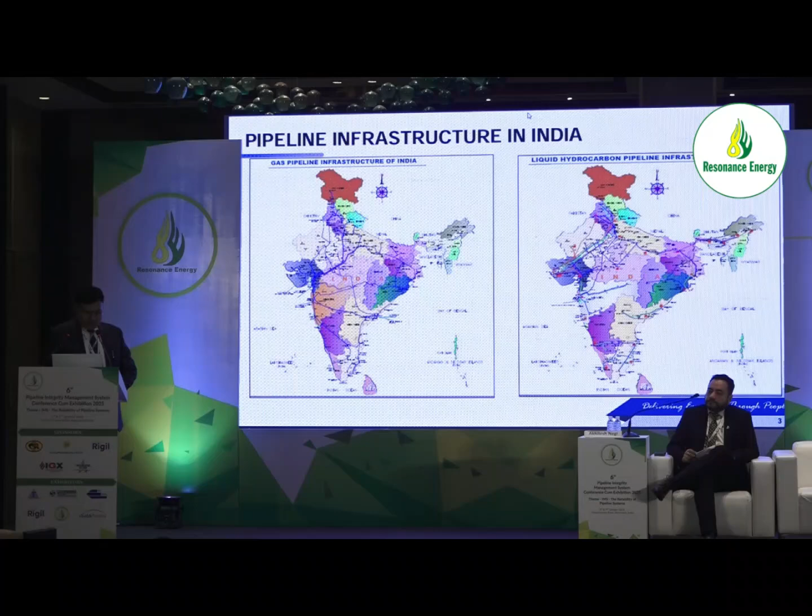This is the introduction of the pipeline. Basically, a pipeline conveys fluid from one location to another. This pipeline system is a very economical, cost-effective, and efficient way to transport fluids.

As you know, our country is the most populous country, having the world's number one population. Worldwide, we are the third largest energy consumer. As per our energy basket, gas-based economy is only 6%. The Government of India has given a target to companies that this should go to 15%. Globally it is 22%, and the world is moving to 25%. But to increase the gas-based economy from 6 to 15%, more pipelines are required.

Pipelines have become significant propellers for the growth of Indian industry. That's why, to meet the energy demand of the most populous nation, many more pipelines are required. Pipelines transport crude oil, products, gas, and many more.

Pipelines have compressors, valve stations, and control systems. This pipeline system provides energy security to all consumers, whether residential, commercial, or industrial, because pipelines transport energy continuously with minimal delays. Unlike tankers, which deliver energy in bundles, pipelines transport it continuously.

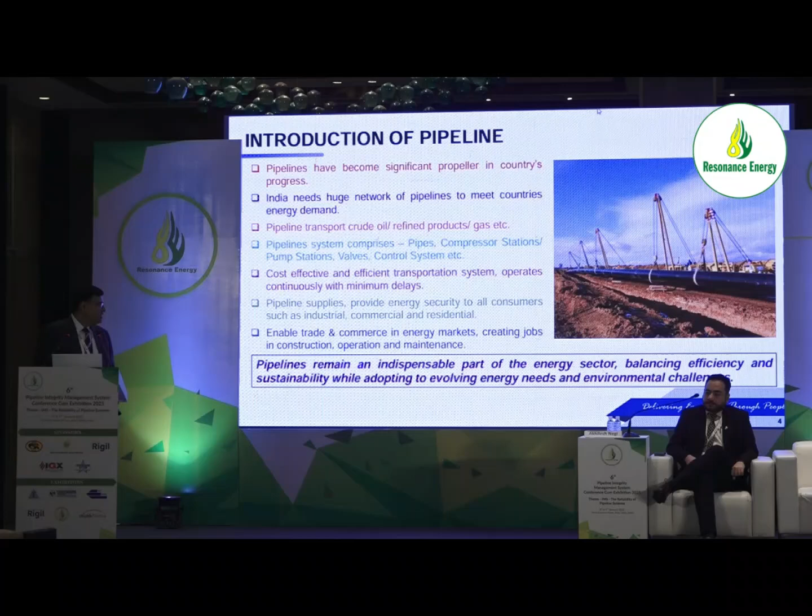This is the way of transportation — as I told, it requires less energy. For transporting product, gas, or any other fluid through pipelines, the energy requirement is approximately 0.5 to 2%, as compared to 3.2% for road transport. There's also negligible loss of product in transit — 0.15% by volume transported through pipelines versus 0.35 to 0.5% in railroad.

If you compare the transportation system by pipelines in India and America, India's pipeline transport share is only 32%, with 68% transported by road, rail, and water carriers. However, in America, pipeline transport is 68%, water carriers are 27%, and others are 2 to 3%. In America, pipelines span 5,73,000 kilometers; in China, 1,50,000 kilometers; in Canada, 1,17,000 kilometers. But in India, only 56 to 57,000 kilometers, even though we are the most populous nation.

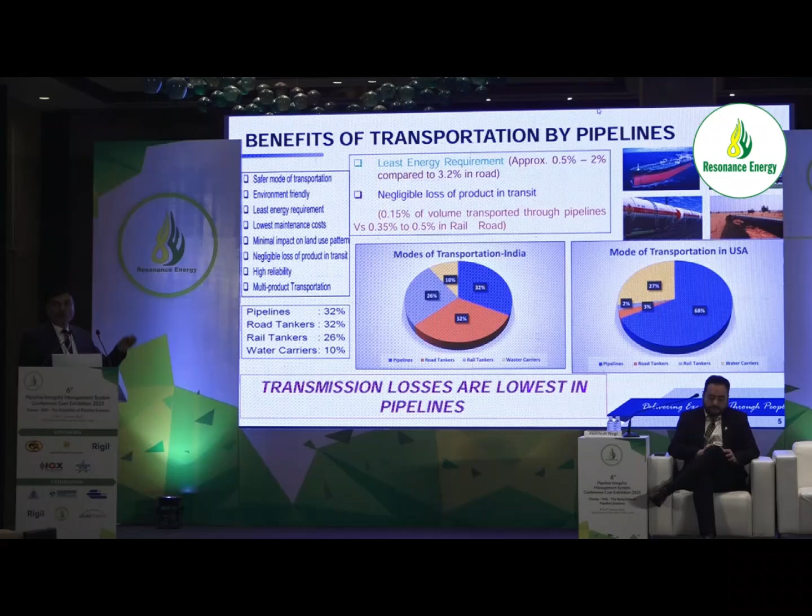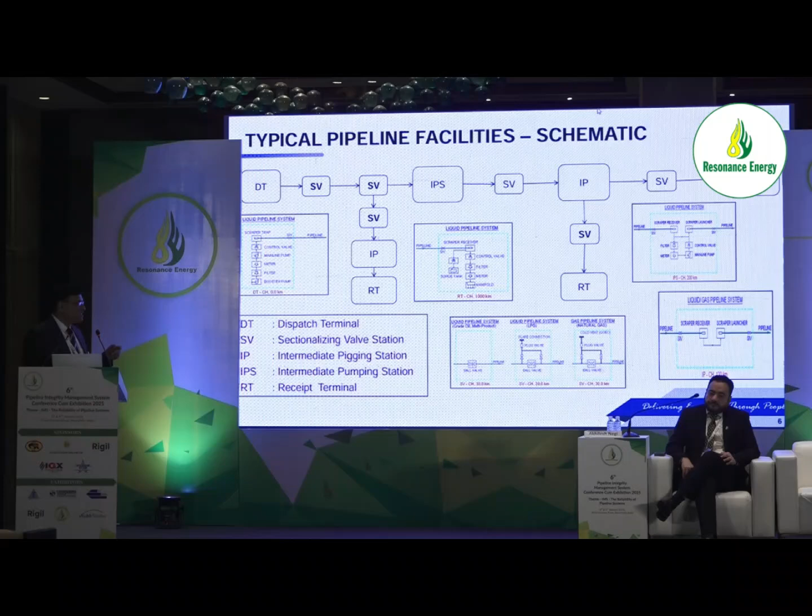This is the typical pipeline facility, meaning transmission lines as well as spur lines. The system includes dispatch terminal, SV station, intermediate pigging station, pumping station, and receipt terminal. For gas pipelines, there is also a compressor station.

These are basically the project phases of a pipeline: one is the design aspect, another is installation, and the third is operation.

In design, there are many studies we have to carry out. We follow different codes like API codes, ASME B31.8 for gas pipelines, B31.4 for liquid pipelines, and various analyses such as API RP 1102 for rail and road crossings, API 1104 for welding, API 6D for valves, and many more codes for designing pipelines.

There is also a location class survey in the case of gas pipelines, and what was discussed earlier as HCA, High Consequence Area — this has now been changed to CCA, Critical Consequence Area, in OISD 141, latest edition. The definition has changed from HCA to CCA. Earlier, 46 or more dwellings was called HCA; now it has a different definition.

That is totally defined in the OISD 141. Then there is a sectionalizing valve. Nowadays there is a very much challenge about sectionalizing valve installation because nobody is able to procure the land to install the pipeline SV station. That's why optimization of SV, we will define later in slides.

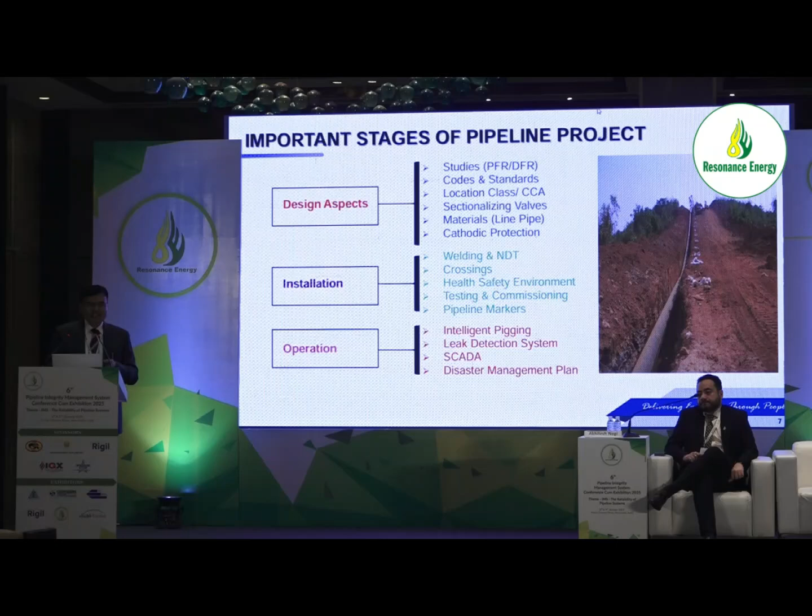And installation involves many activities like trenching, stringing, welding, crossing, and health safety environment during construction, which is very much important for the pipeline. And finally, testing and commissioning, which we will explain later. Finally, after installation, there are pipeline markers showing where the pipeline is going. And operation includes intelligent pigging, leak detection system, SCADA, and disaster management plan.

Now these are the basic activities. First one is conceptualization, then detailed feasibility report, basic engineering, and detailed engineering.

In conceptualization, what do we do? Basically, we study various alternative routes for the pipeline, to determine which route is most techno-economically feasible, and what are the constraints in various routes, which route has fewer constraints. Accordingly, we select the option for investment, and then prepare the detailed feasibility report.

In the detailed feasibility report, we define each and every route option, and each and every crossing, and what type of methodology to be adopted for installation at that crossing. Hydraulics determines the size of the pipe, and design requirements, and requirements for MTO, material takeoff - how much quantity of pipe is required, how much material for station piping, how many land parcels are required, and total project cost is established, up to plus or minus 10%. That is the detailed feasibility report.

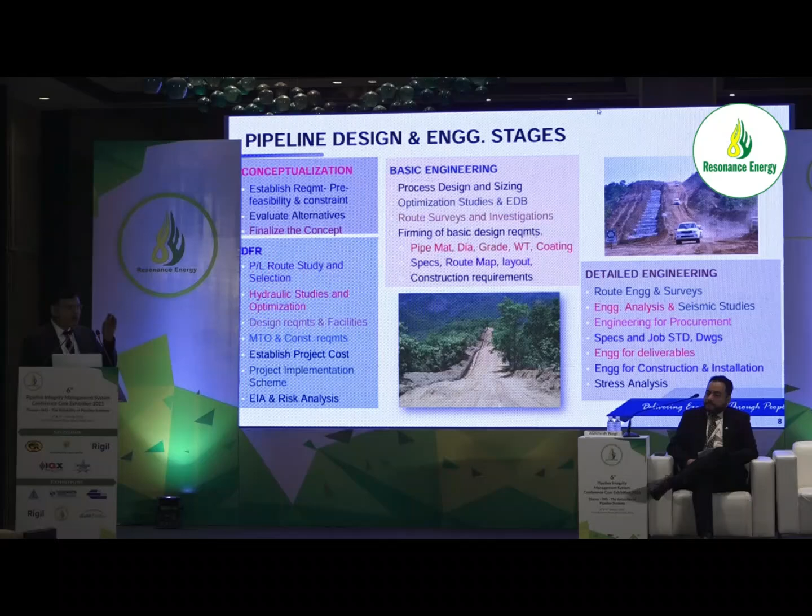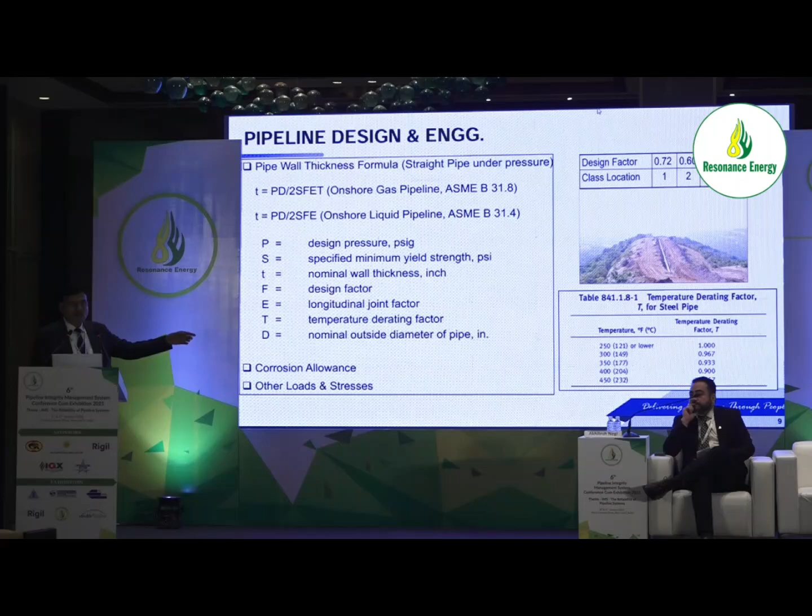If you see, the temperature derating is for steel. Up to 121, there is no derating, but beyond that, there is a derating factor, since material strength gets reduced.

These are the basic reports which we prepare during design, basically wall thickness analysis. Normally, wall thickness is calculated based on the hoop stress. Some thickness may come out, suppose 5 millimeter or 10 millimeter, whatever it may be. Then we analyze where the pipeline passes beneath the railway, beneath the highway, rivers, roads, based on API 1102.

According to that analysis, whichever thickness comes out higher, we have to select that. Then again, we have to check if the pipeline is passing through a seismic zone, and analyze the seismic requirements.

If thickness has to be increased, then it has to be increased, and that much thickness should be selected, not based solely on hoop stress. Whichever thickness comes higher, based on that we select. We have to compare whether this thickness is available in the market or not, checking what thickness of plate or pipe is available. But if quantity required is more, as per API 5L, nowadays any thickness can be manufactured. So if quantum is high, this can be manufactured, and we select based on that thickness. But if pipe quantity is less, then we have to go for the standard thickness.

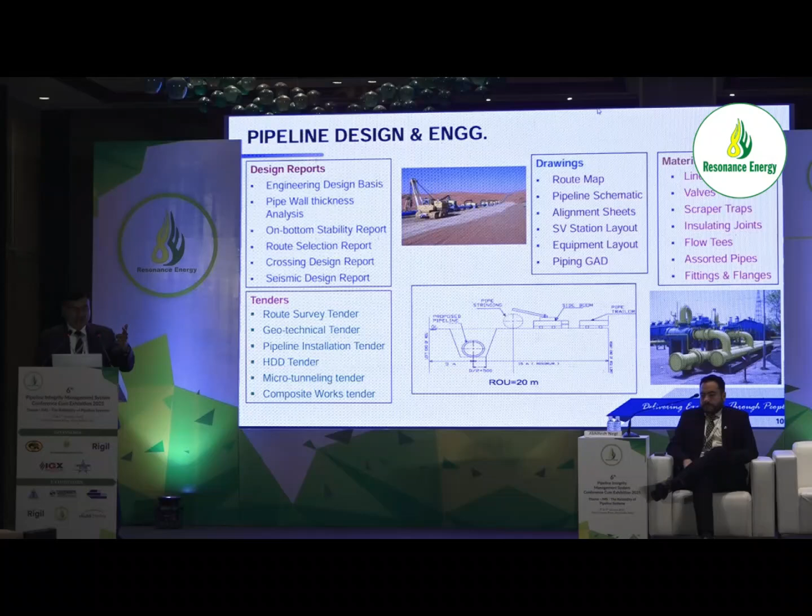This is basically the line pipe selection criteria, and it is most important because it accounts for 35 to 40% of the project cost. The line pipe is selected based on fluid characteristics—the type of fluid, whether gas or liquid, corrosive or non-corrosive—and the operating condition, what is the pressure and temperature.

Suppose it is a permafrost region, then we have to select the material according to that. Mechanical properties matter too—what is the yield strength, whether it is grade B, X42, X46, X56—according to that we select. Toughness and Charpy requirement depend on the operating temperature of the pipeline fluid, and accordingly we take the Charpy requirement. Hardness of the material is also very important for the line pipe.

Various standards—normally in India we follow the API standard for procuring line pipes—and environmental parameters like extreme temperature, geographic consideration, and external corrosion matter. Suppose soil resistivity is very high, then we have to select the material according to that.

And welding and fabrication—when we select the pipe, we have to see whether pipe formation will be easy or not. Suppose it's a very tough material, then pipe formation will be very difficult. You can ask Mr. Bhavin Mapra, he is well versed and can explain it very well.

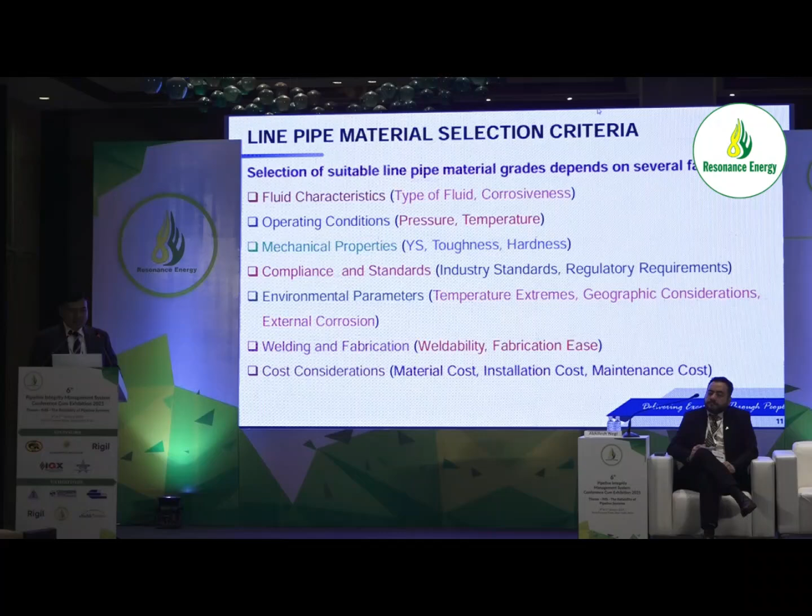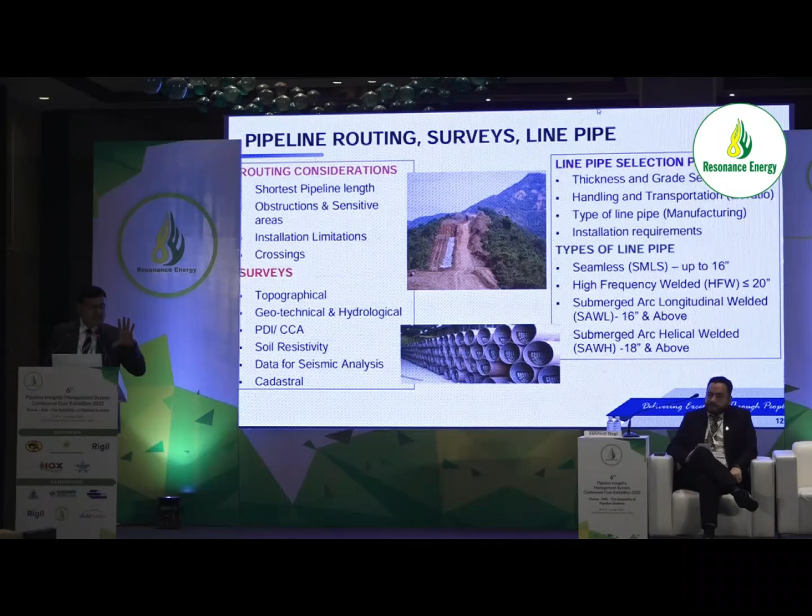Then pipeline route surveys—these basically cover shortest route, avoiding obstructions and sensitive areas, and installation limits. Suppose you are going over a hill, then you have to see what length of pipeline can be installed. If a 12-meter pipe cannot be installed up to that height, then you have to take a 6-meter or 4-meter length of pipe, and select accordingly.

And crossings like river crossings, ponds, marshy lands, railways, highways—these should be minimized as much as possible. Then there's topographical data, surveys, geotechnical and hydrological studies, and PDI, basically population density index, in case of gas pipelines. For gas pipelines, there is a population density index with class 1, class 2, class 3, and class 4—four classes.

If population density is less than 10 dwellings, then it is location class 1. If it is 10 to 46, then it is location class 2. If it is more than 46 dwellings, then it is location class 3. If multi-storied buildings are present, suppose passing through city areas, then it is location class 4. Accordingly, the design factor changes, as I have shown in the earlier slides.

Then, as I told you about line pipe selection, thickness and grade selection, handling and transportation of pipe are also important because the D by T ratio is very important. Normally, we select the D by T ratio to be less than 100 for the pipe. Suppose the thickness coming from pressure calculation is less, and D by T is getting more than 100, then we cannot select that—we have to select based on the pipe or D by T ratio. To control the D by T ratio means the thickness will get increased.

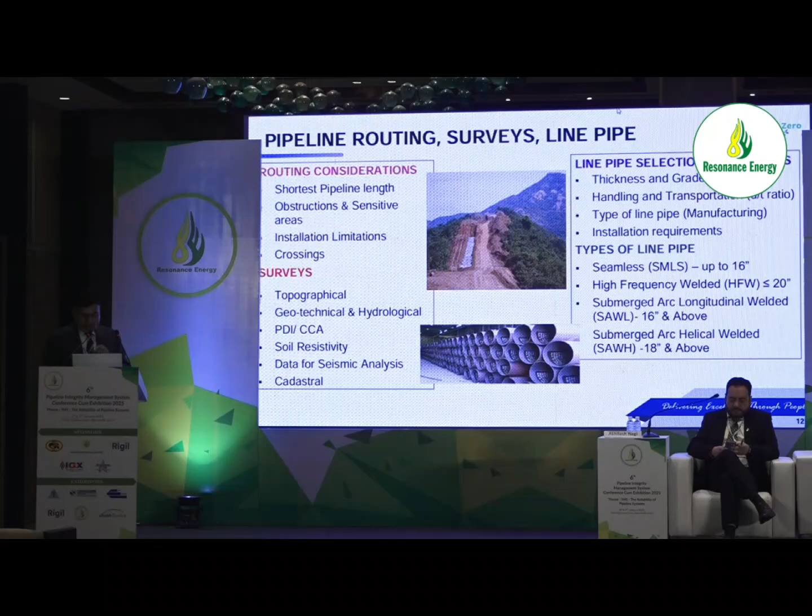Type of line pipe, like SAWL pipe, SAWH pipe, HFW pipe, or seamless pipe—what type of pipe is required to be selected depends on the manufacturing range. Seamless pipe can be manufactured up to 16-inch. High frequency welded pipe is normally taken up to 20-inch, but a few manufacturers like Tata Steel manufacture up to 24-inch HFW pipe. Longitudinal welded pipe is used for 16-inch and above, and helical welded pipe for 18-inch and above.

These are basically the coating selection criteria. As I told you, coating is very important for reduction of the surface area of the pipe for cathodic protection. The coating selection criteria include service conditions, performance of the coating, anti-corrosion properties, and electrical properties like

dielectric strength of the coating material. Ease of application means when coating is applied at the coating plant, it should be easy to apply. And after coating application, repair should be easy, and it should be cost effective. The coating should also have UV protection, so it should not degrade when we keep the pipe in open sun.

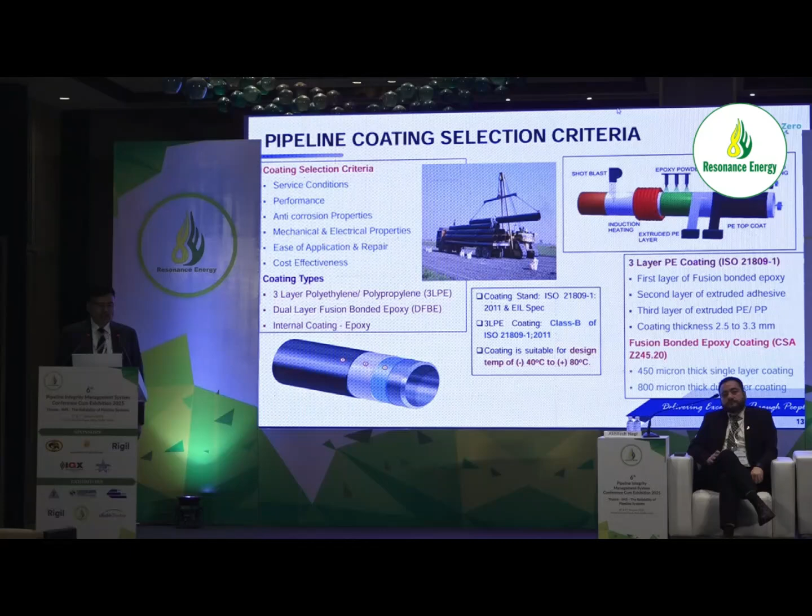Then there is the valve selection criteria. Valves are very important in pipelines, like sectionalizing valves. There are many types suitable for the intended service and application. Suppose it is gas, crude oil, or white product—the valve bore shall be as per API 6D, because valves are based on API 6D as per codes and standards.

Easy operation and maintenance is required. Whoever is supplying must have a previous track record, meaning they have previously manufactured that type of valve and supplied it, and it is in operation. This is very important, because if it's the first time it's being made, it may not perform well and your investment gets lost. Also, the lowest O&M cost—operation and maintenance cost—should be lower.

Sectionalizing valves should be full bore, because we have to pass the pig through the valves. Welded body design is normal for all sectionalizing valves, because if it is flanged, there is a chance of leakage. That's why all sectionalizing valves are buried and of welded body design. For operation, there is a stem extension. And most important is availability of vendors—the vendor must be available, because if the vendor is not there, how are you going to purchase the valves?

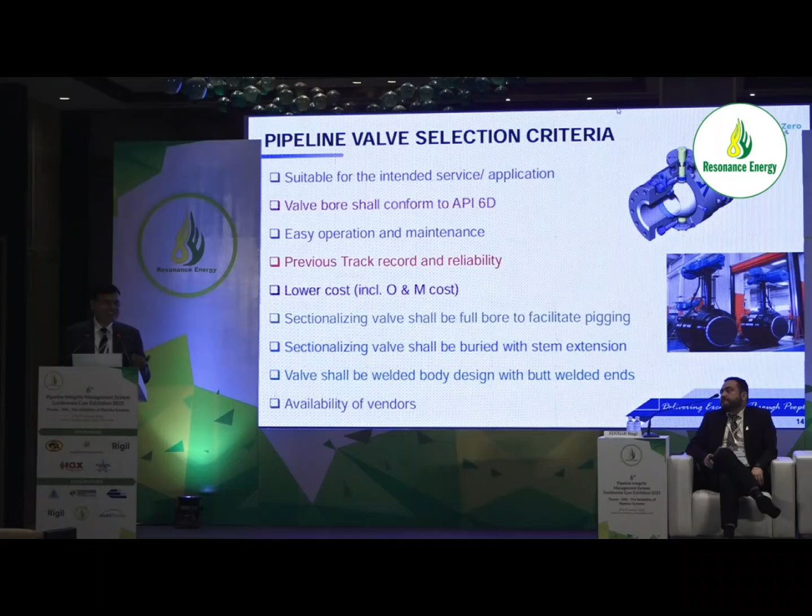Then SV selection criteria—as I told you, SV selection is very important. In gas pipelines, SV installation depends on class location. If it belongs to class 1 location, the spacing requirement is 32 kilometers. In class 2 location, it is 24 kilometers. In class 3, it is 16. In class 4, meaning city area, it is 8 kilometers.

But you have to carry out the PDI, Population Density Index survey. Normally, what our surveyor does—survey agencies take 1.6, 1.6, 1.6, 1.6 kilometer segments. But this is not correct—it should be 1.6 kilometer long and 400 meter wide. They just take it and survey accordingly, putting this much population, this much population. Basically this is not the correct method to do the population density index survey.

That is called end-to-end mile survey, but we should do a sliding scale survey instead. Basically, we have to select a 1.6 kilometer stretch, check it, then slide it to where the density is going to change. Accordingly, we slide and optimize how much is class location 1, how much is class location 2, how much is class location 3, how much is class location 4. That is the optimized way of doing the population density index.

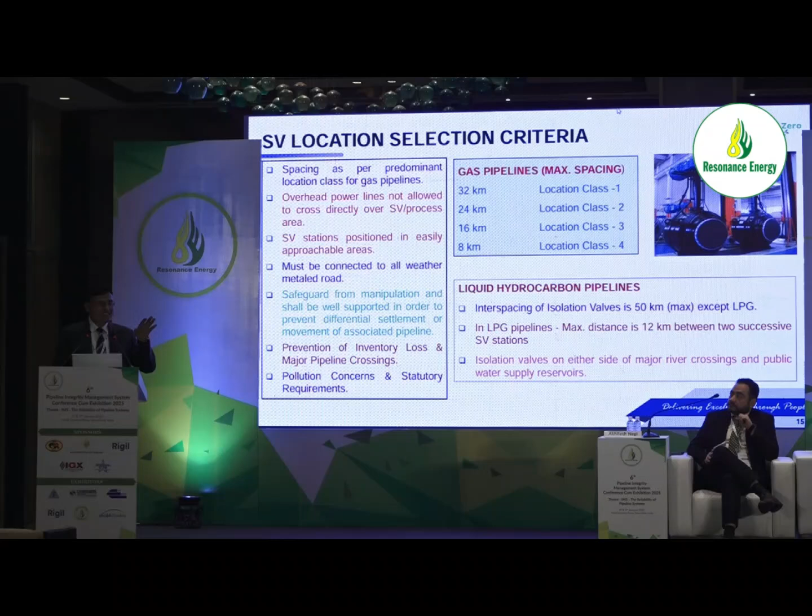Another consideration is access required—as I told you, it should be all-weather accessible. The SV should be free from existing structures and obstructions such as electric poles, pylons, etc. The location has to be checked—when we select the SV location as an engineering consultant, we look at the imagery available in the public domain, and the survey alignment data provided by the client and carried out by the survey agency. According to that, we check where the metalled road is, and whether there is any electric pylon or electrical line at that location.

According to that, we select the location considering the code requirements—32, 24, 16, 8, or 50, or 12 kilometers, whatever it may be. And the area should be free from flooding and inundation—there should be no water logging in that area.

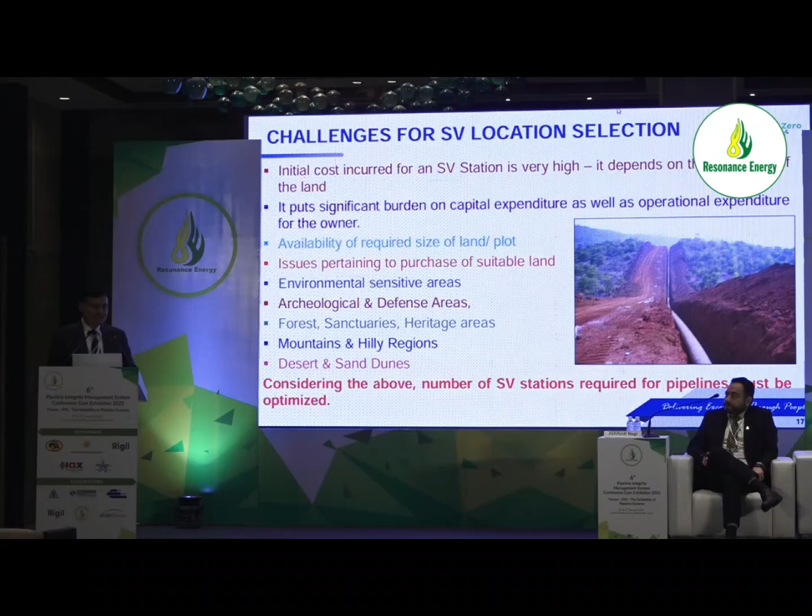Considering the above, number of SV required must be optimized. So how is optimization done? Based on the sliding PDI, as I told, number of SV stations can be optimized considering the predominance of population location. For liquid hydrocarbon pipeline, considering the challenges associated with SV station locations, instead of providing dedicated SV on either side of the river, each SV station has to be optimized. If you see the diagram, there are two SV with two rivers. If the two rivers are close to each other, then we optimize and provide only two SV. Otherwise, as per code, 4 SVs are required.

But in the second case, if you see, the two rivers are a little bit away. Then in between, we have put one SV. As per code, another SV is required because 4 SVs are required total. So that much optimization we have to carry out based on engineering analysis.

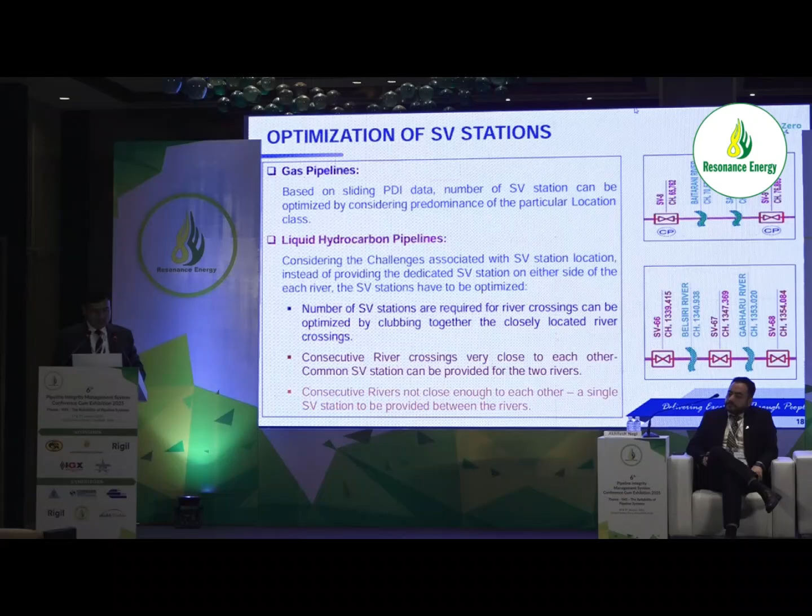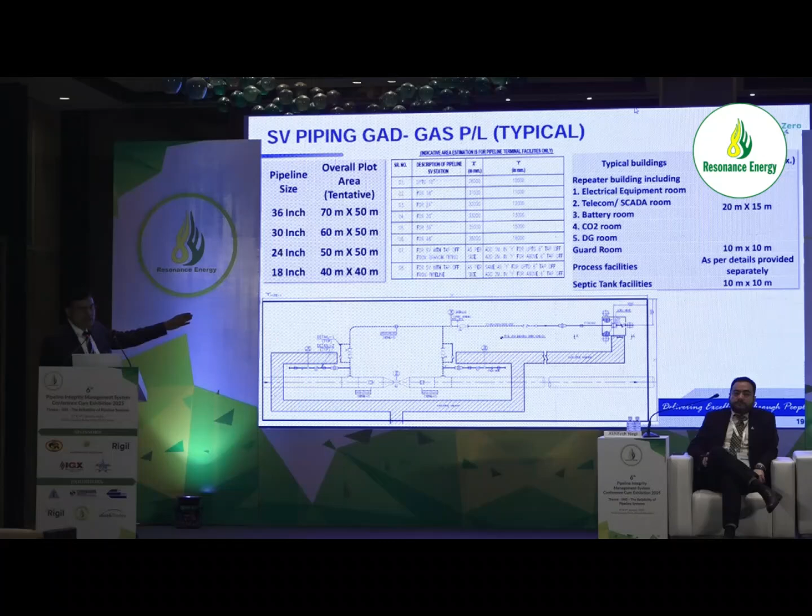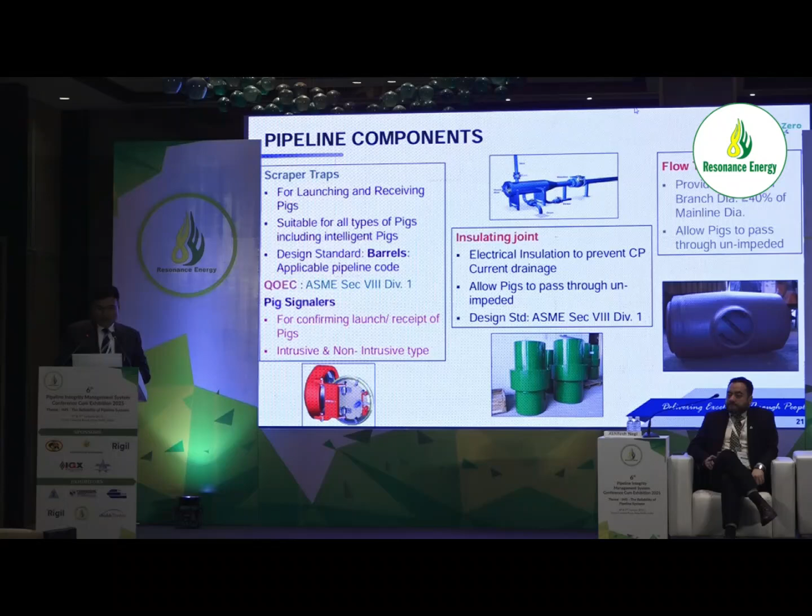This is the SV land requirement. If you see the gas pipeline, we have given the overall plot requirement and what are the process area requirements. If you see the dimensions, process area requirement for each and every size of pipeline - this is typical, and overall plot requirement is this. And for the liquid pipeline, process area requirement is this, and overall plot requirement is this, as indicated. These are the typical pipeline components - scraper launcher, pig, insulating joints, and flow tees.

Now pipeline construction. There are many stages in pipeline construction. One is pre-construction survey, then installation, then crossings, testing, pre-commissioning, and commissioning. In pre-construction: route survey, ROU clearing and grading. These are the requirements before digging the trench.

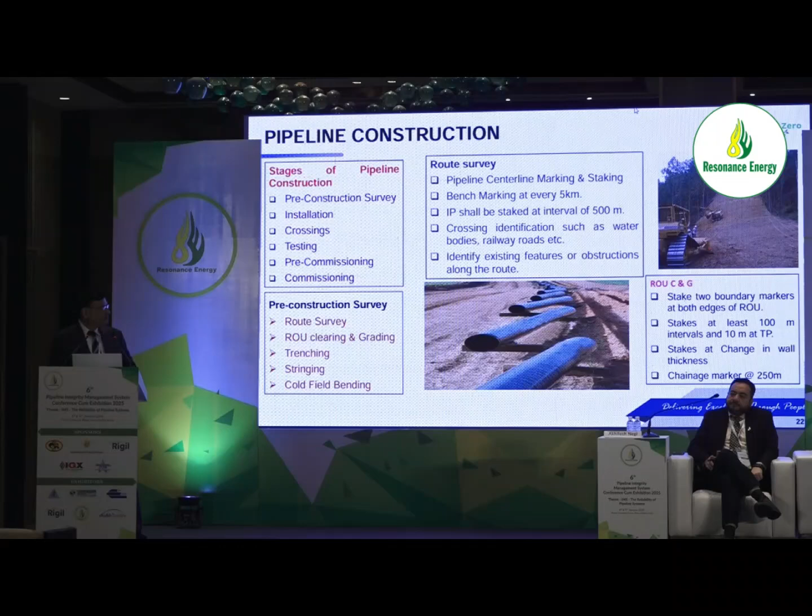Then installation, welding. Welding is very important for any pipeline system. There are 4 types of welding procedures. One is WPS1, called main line welding. Another one is WPS2, called tie-in welding. The third one is repair welding procedure, and the fourth one is also full repair welding procedure. In pipeline, normally WPS1 is totally downhill welding. And in WPS2, that is tie-in welding, because there is cutting involved in the pipe - the pipe is not as smooth as manufactured in the pipe industry - that's why in that case, all passes are uphill.

Then NDT. In pipeline, normally if you see plant piping, there is gamma ray carrying out the NDT. But in pipeline, X-ray is mandatory. All joints must be X-rayed.

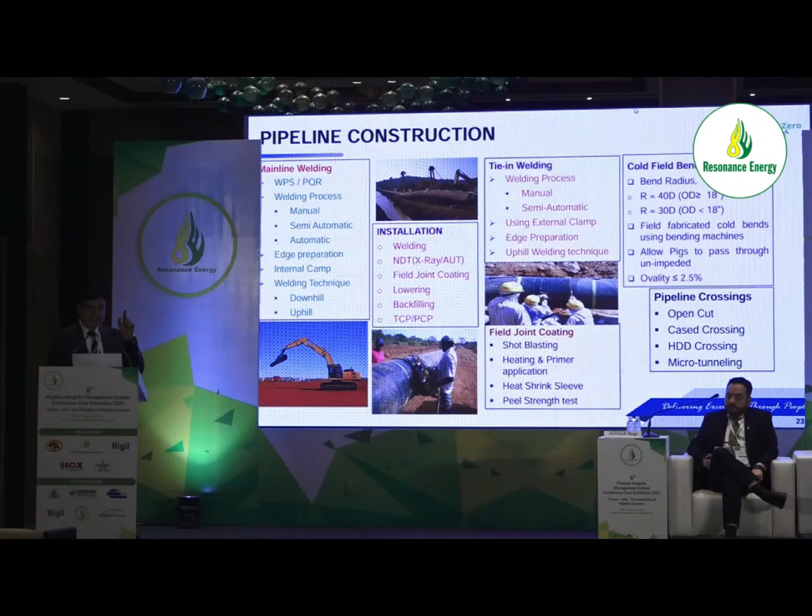And in pipeline, normally as Tiwari told, pipeline is not going in a straight way, in different directions. That's why cold field bending is very much required. So for pipe size greater than 18 inch, 40D radius of curvature is required, and less than 18 inch, 30 times diameter is required. And ovality should not be more than 2.5% of the pipe. Then pipeline crossings - open cut method, cased crossing method, and HDD crossing method. I will explain HDD crossing more, and microtunneling.

This is the pipeline construction testing, hydro testing. Hydro testing is one of the most important parts of the pipeline after construction. It is a strength test, you can say integrity test, whatever you want to call it.

For the pipeline, you have to define the section, how much length you take in one section for hydro testing. As per EIL requirement, I defined 50 kilometers as the section length for hydro testing.

But you have to see whether water is available in that location or not. So first you have to make the hydro test section planning. How do you make the hydro test planning?

Because based on the elevation of the area, we have to calculate P maximum, how much maximum pressure there is and how much minimum pressure there is. According to that, we have to calculate the height.

How much height can be there where maximum pressure is. According to P equals HDG, you calculate the height and select how much length can be taken. It may not be 50, maybe 35 kilometers, because the height increases over 50 kilometers.

That's why we have to select the section length based on water source. If water source is available, according to that, you make the section.

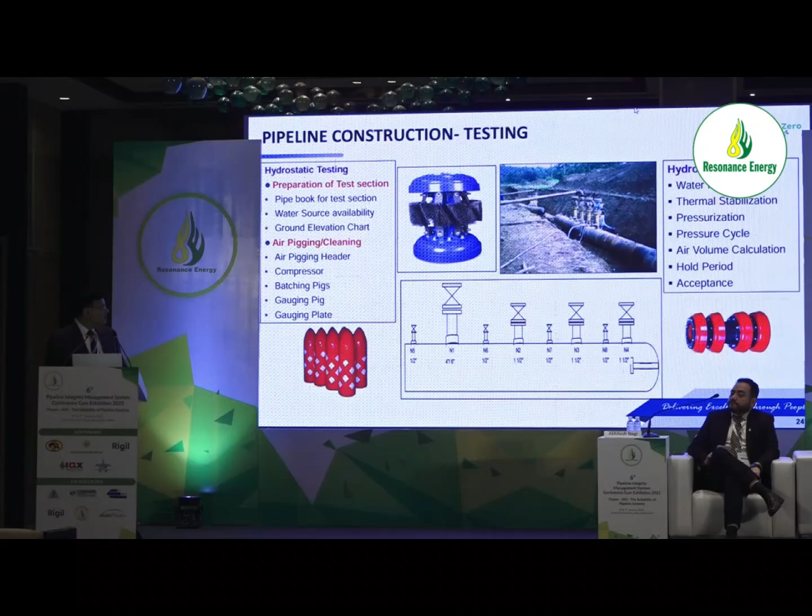For that, you have to install thermocouples. How you install them, how much distance apart they have to be installed, and how you determine the pipeline is thermally stabilized.

When the difference between the average temperature of the soil and the average temperature of the pipe is 1 degree, then you can say the pipeline is thermally stabilized.

After thermal stabilization, you have to start the hydro test pressure cycling. In pressure cycling, you have to check how much air is entrapped in the system.

Then we calculate theoretical volume by formula and practical volume by dropping 0.5 bar pressure and collecting the water. The collected water divided by the theoretical water calculated, that ratio ideally should be 1.

If it is not 1, it should not be more than 1.06. If it is more than 1.06, you have to recalculate, and if it is still not coming within range, then you have to drain out and refill the water.

Finally, the acceptance criteria: when water is filled and everything is okay, then the difference between initial pressure and final pressure after 24 hours should not be more than 0.3 bar.

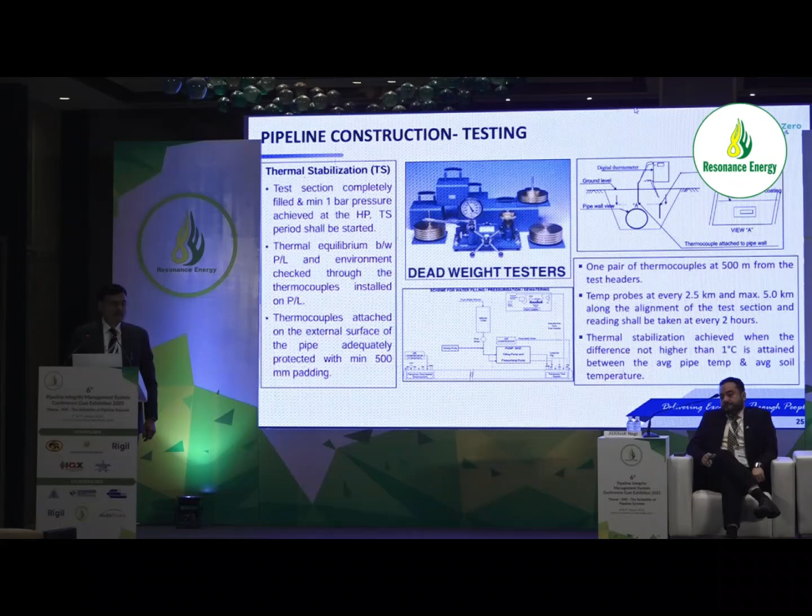Now I am going to talk about long length HDD crossings.

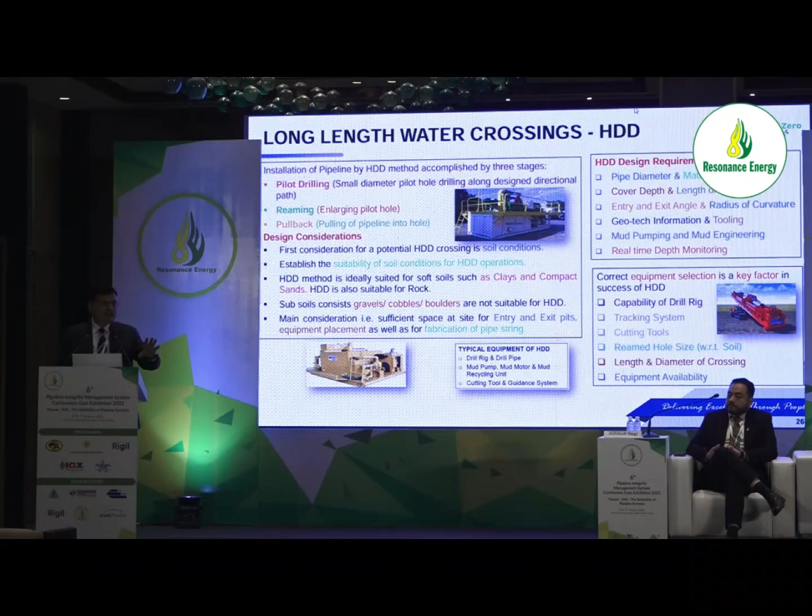And in HDD, drill pipe is very important. Nobody asks about how much quantity of drill pipe you have. Suppose you want to carry out HDD of 1000 meters, then you require 2 kilometers of drill pipe if you ideally carry out. Otherwise, you have to again and again transport the pipe here and there.

Now the technical feasibility and pilot hole limitation. The technical feasibility of HDD basically depends upon the length of borehole, pipe diameter, and subsurface conditions. As I told, geotechnical data.

Basically it depends upon the hole - whether it is fluidized or open. Fluidized means...

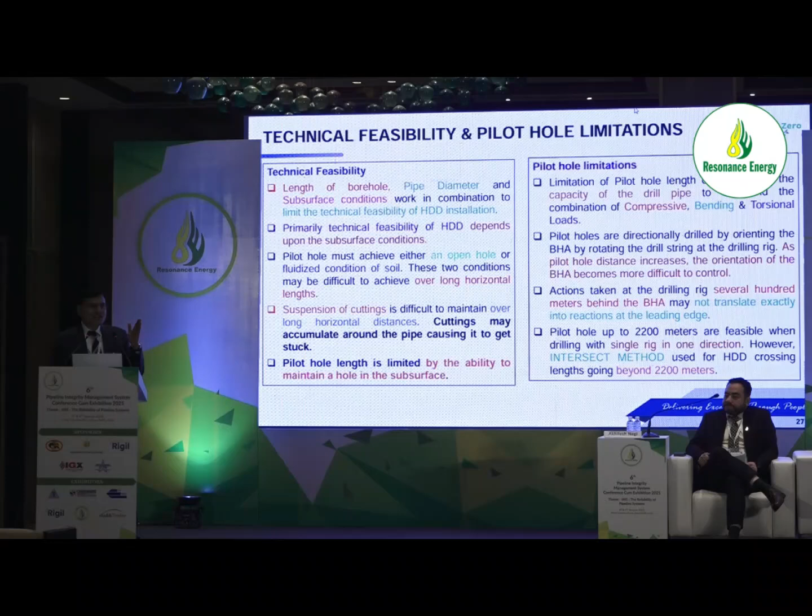That's why up to 2,200 meters by one rig you can carry out the HDD easily. But if there is a longer length, we have carried out in the Paradip Numaligarh pipeline: Ganga at 4,000 meter HDD, Bhareli river 4,000 meter HDD, Subansiri 4,000 meter HDD, even Brahmaputra we are carrying out 4,000 meter HDD. For that we require the intersect method.

In the intersect method, what we do: we put two rigs, one rig from this side and another rig from the other side. We carry out the hole from both sides - pilot hole. And there is a tracking system. Both machines communicate with each other and track when they come to closure, come to the handshake of each other. At that time we stop one rig and move forward with the other rig. After meeting, we backtrack this rig, and since there is a path, now you can easily go through that path and the rig intersects.

Even in Hong Kong, 5,000 meters they have carried out HDD with the intersect method at Hong Kong airport.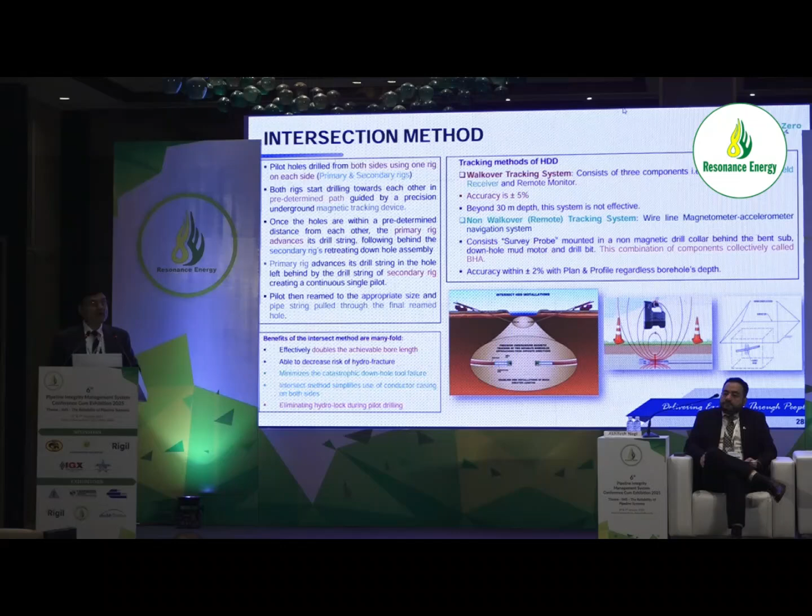So in conclusion, I can say that pipeline integrity in design involves ensuring reliability and safety of pipelines throughout their life cycle, including material selection, valve selection, coating selection, best construction practices, corrosion prevention, and ongoing monitoring to prevent leaks and failures. Line pipe selection, as I told, valve selection, and location are crucial for the pipeline system.

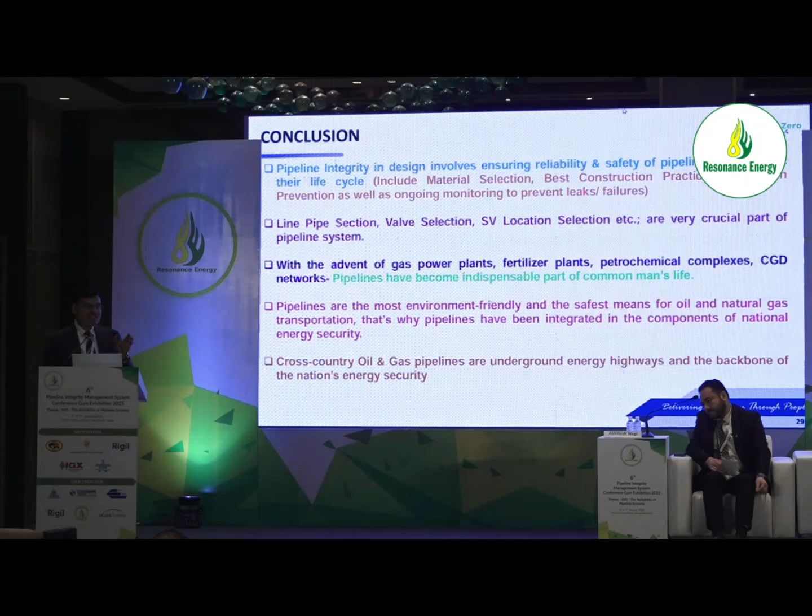With the advent of gas power plants, fertilizer plants, petrochemical plants, and CGD networks, pipelines have become an indispensable part of the common man's life. Pipelines are the most environment-friendly and safest means for oil and gas transportation. That's why pipelines have become an integrated component of national energy security and the backbone for the energy supply chain. That's why you can say that pipelines are underground energy highways. Thank you.